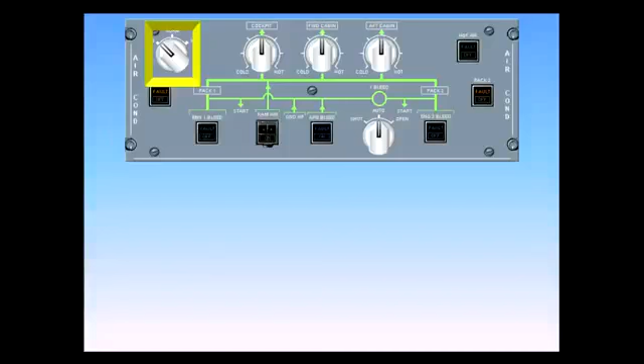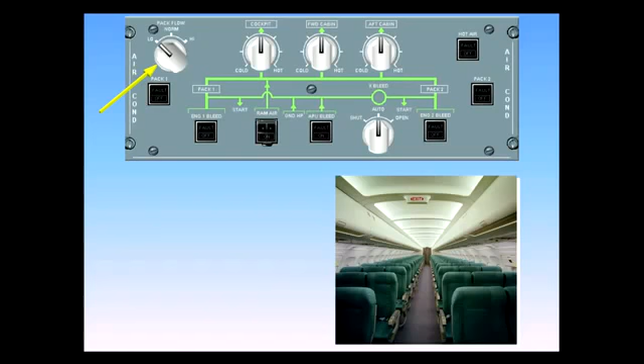In situations of low passenger numbers, the pack flow selector can be set to low. This has the effect of reducing the bleed demand from the engines and will therefore save fuel.

Occasionally, with a full passenger load and high ambient temperatures, it may be necessary to select high pack flow and cold to reduce the cabin temperature. Using high pack flow will increase the bleed demands from the engines and use more fuel.

Once airborne, the flow selector should be returned to normal and the temperature selectors adjusted as required.

It is now time to get some air to the packs. As the APU is already running, set the APU bleed to on and watch the ECAM indications. Switch APU bleed to on.

Notice the APU valve indication has changed to inline green. The cross-bleed valve has automatically opened. Notice the cross-bleed switch is in the auto position. Both feed lines to the packs have been connected.

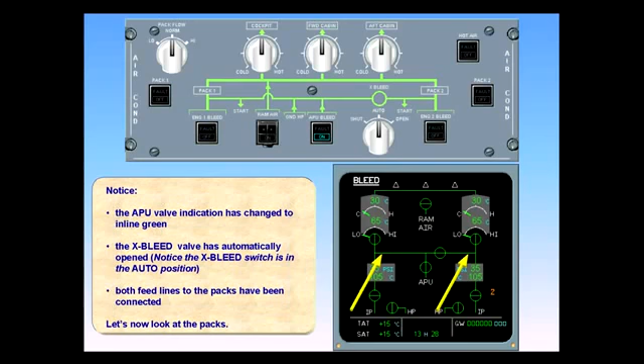Let's now look at the packs. Notice the fault lights are extinguished due to the air supply. The pack flow valves are opened. The pack flows increase.

The bypass valves move. The supply lines to the mixing unit are now connected. Both packs are now providing air conditioning.

Let's look at temperature regulation of the air conditioning system. This is better seen on the ECAM conditioning page. Call the ECAM conditioning page.

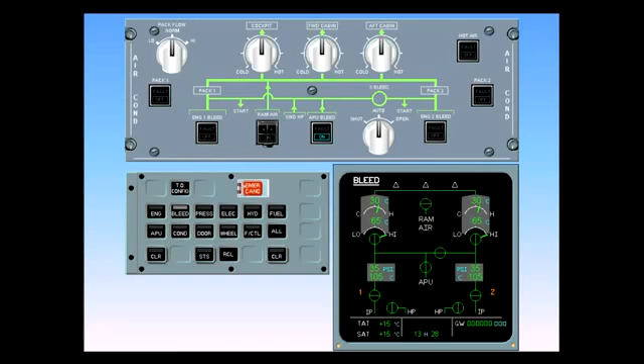We will concentrate on the upper part of the page. Of particular interest here are the zone temperatures and the duct inlet temperatures.

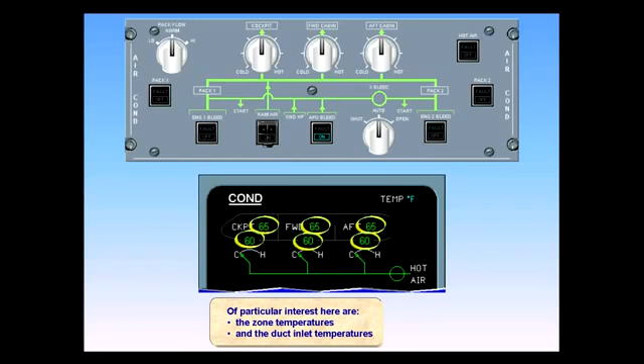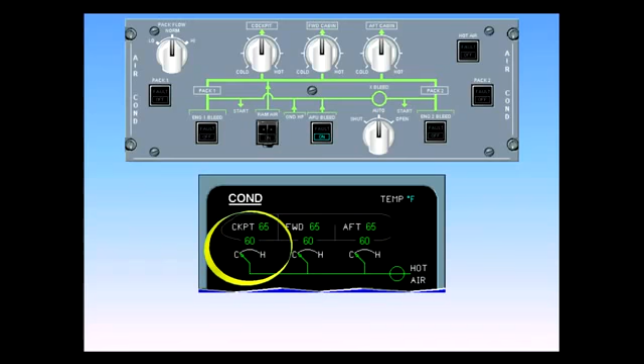Temperature regulation is achieved the same way for all zones. We will demonstrate the concept using the cockpit zone as an example. The cockpit zone temperature selector is in the 12 o'clock position. In this position, a zone temperature of approximately 74 degrees is demanded.

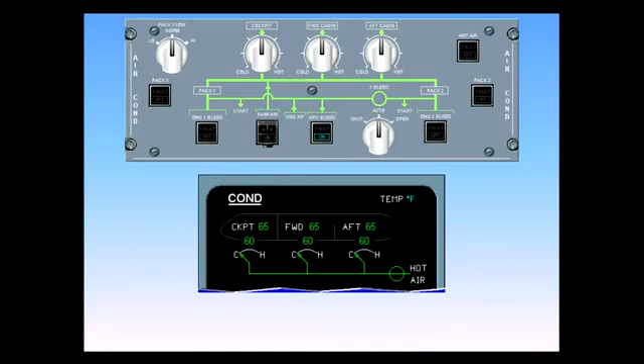Since 65 degrees is less than the requested 74 degrees, the zone controller sends a command to increase the amount of hot air needed. As a result, the trim air valve opens.

The zone duct temperature increases as warm air is supplied to the cockpit zone, and the cockpit starts to warm up.

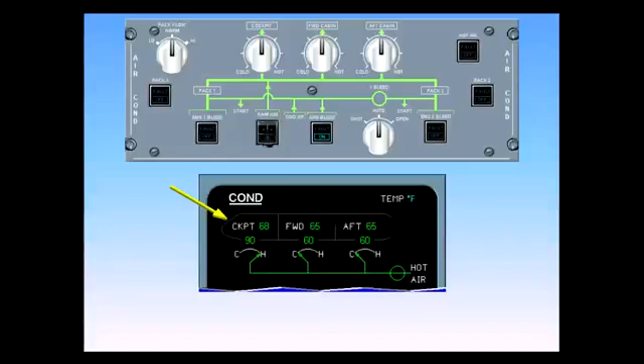When the cockpit reaches the requested temperature, the trim air valve will move toward closed, reducing the amount of hot air. It will then move as required to maintain the zone temperature.

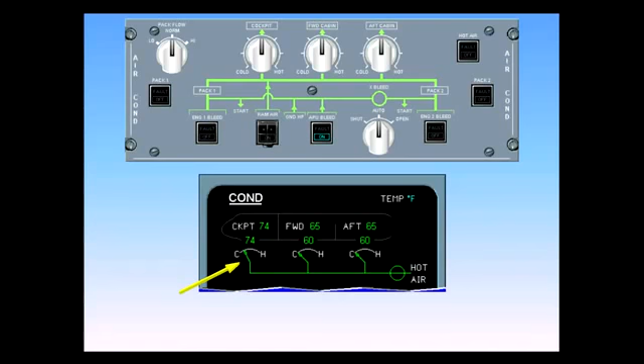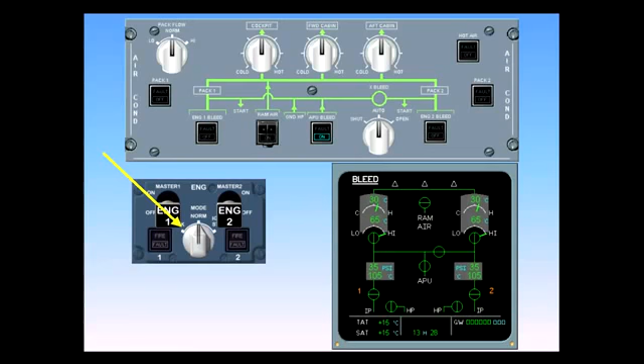During engine start, pack valve operation is automatically terminated. When the engine mode selector is placed to ignition start, the pack valves automatically close, thus routing all APU bleed air for engine start.

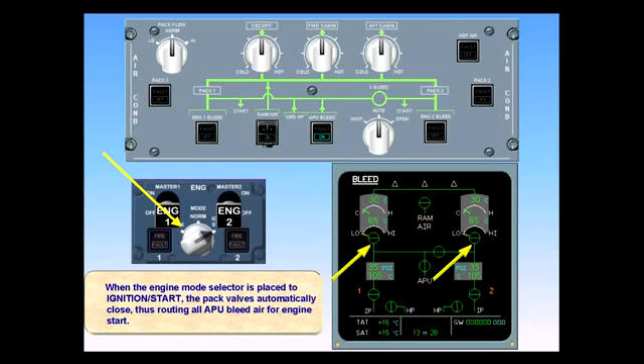After engine start, the pack valves reopen. Because the APU bleed valve is still open, the APU will furnish air for the packs.

Notice that the engine bleed valves are still closed, even with both engines running, but that there are no bleed valve fault lights. This is because APU bleed has priority over the engine bleed.

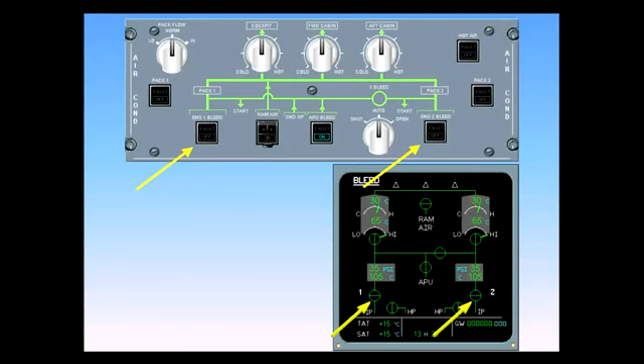In our example, the APU is no longer required. Switch off the APU bleed.

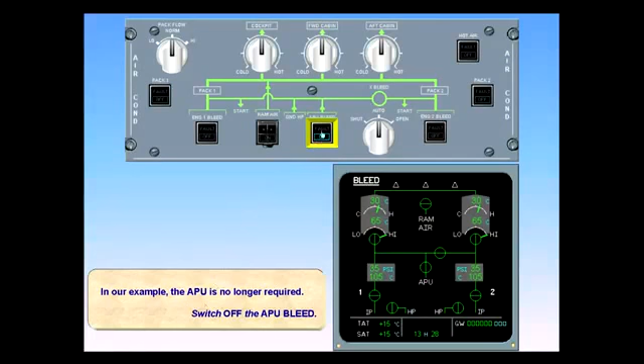When the APU bleed switch is selected off, the APU bleed and cross bleed valves close. The link lines disappear, and both engine bleed valves open, supplying the packs with bleed air.

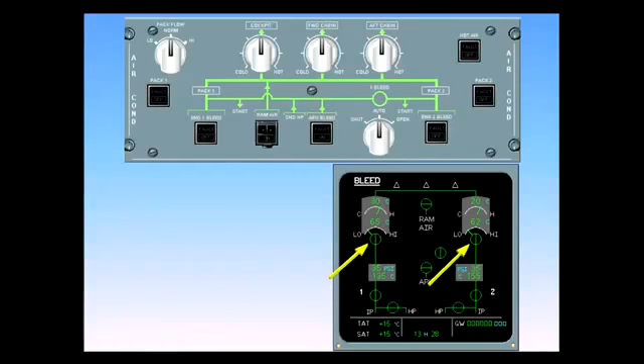Notice that the pack flow reduces. This is because the APU provides a higher flow rate than the engines. Also note that the air conditioning control panel is now in a normal lights-out configuration.

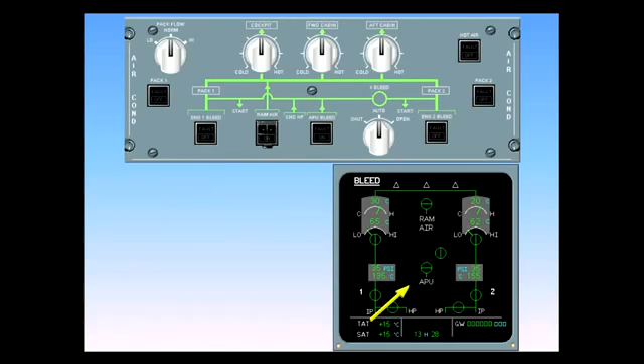When the APU is shut down, the APU symbol on the bleed page is removed.

The Fahrenheit temperature scale, UAL aircraft, reads from 64 degrees at cold, brisk, to 86 degrees at hot, toasty.

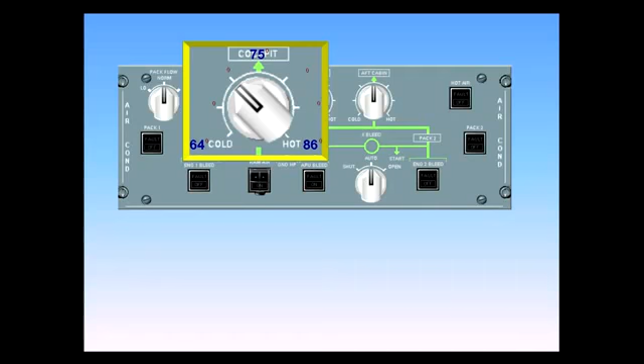During the flight phase, the air conditioning system will work automatically, and the only likely pilot input that may be required is to adjust zone temperature.

Let us assume that you wish to cool down the cockpit. To demonstrate, please select the cockpit zone selector to cold.

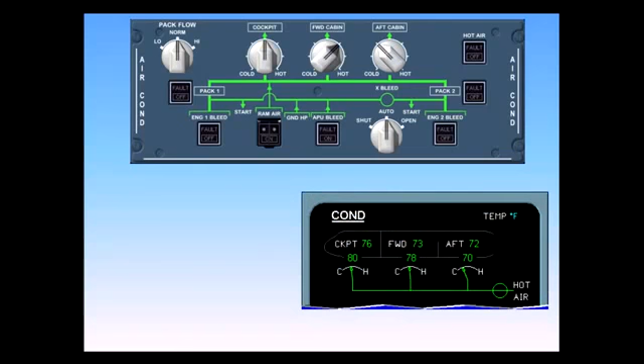Because you have requested a cooler temperature, the trim air valve moves toward closed. Cool air from the pack itself will supply the cockpit zone.

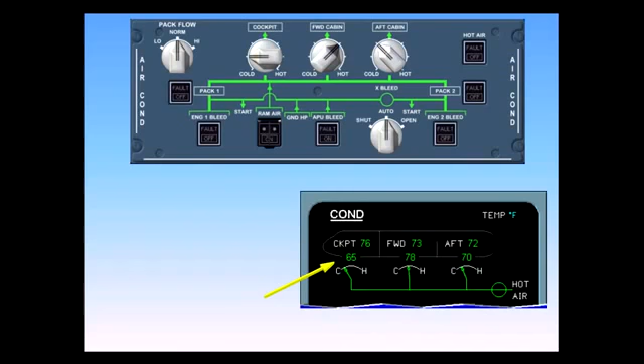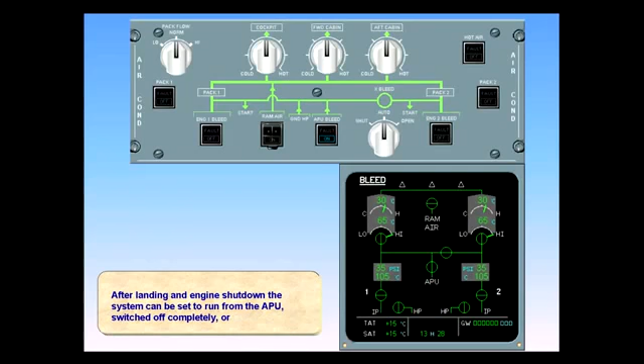After landing and engine shutdown, the system can be set to run from the APU, switched off completely, or an external conditioning unit can be connected via a low-pressure connection point on the underside of the aircraft.

The low-pressure air is fed to the mixing unit and then into the 3 zones. There are no indications in the cockpit to show that an external conditioning unit is in use.